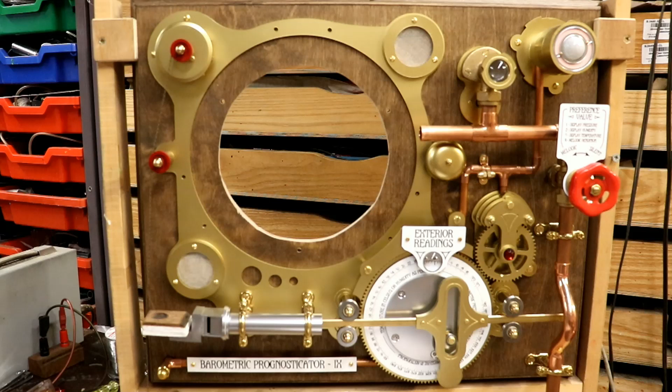Welcome back. Another day. Ooh, bellows, which have now been sanded, cleaned up and stained. They look lovely. And as I said before, I'm going to use gravity, that steel weight in the top. And you can see, even with it just resting on paper, it takes a while to close. And the motor's going to lift them up with a spring and a stop, so they don't risk damaging this really fine, amazing sort of fabric type paper stuff.

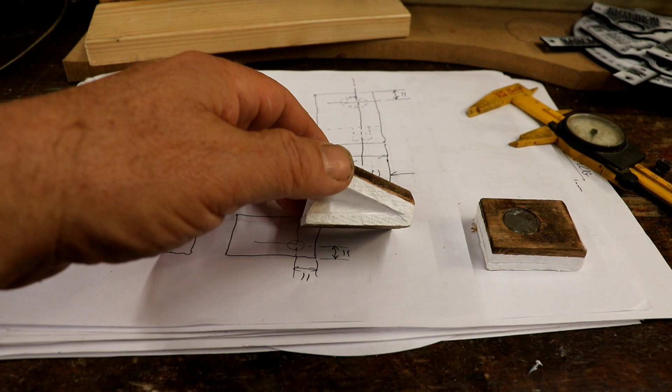In the meanwhile, how exciting! There's a flute. In fact, it's going to end up like that. That's painted up beautifully. And there's the right angle thing. That's just masking tape to make sure that when I glue the bellows on it, it actually does stick properly. I'm so pleased with that mitre joint idea. That worked really, really well. So there's one, and there's another one. Because it's the silver paint, even though I sprayed them last night, I'm going to leave it to set for as long as possible.

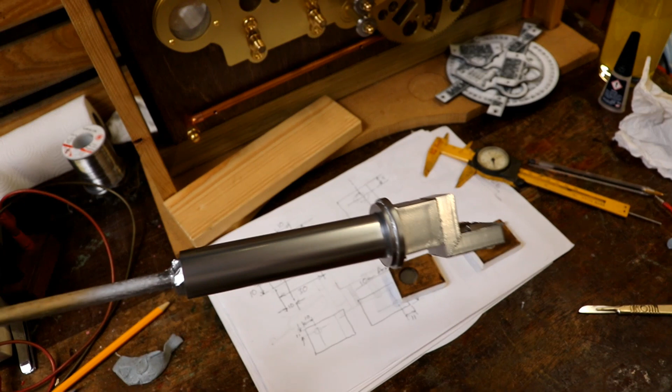Next thing, I think I'm going to turn the bung that fits in here, that changes the pitch. I know I've got more of this pipe, so I can practice with that without touching these. This is my chosen bung plastic. I think it's polyethylene or something like that. It's slightly waxy, so it slips nicely within the acrylic tube. So I'm going to do about 20mm long, and then just turn it down so it slides easily and doesn't stick, but equally is as airtight as possible.

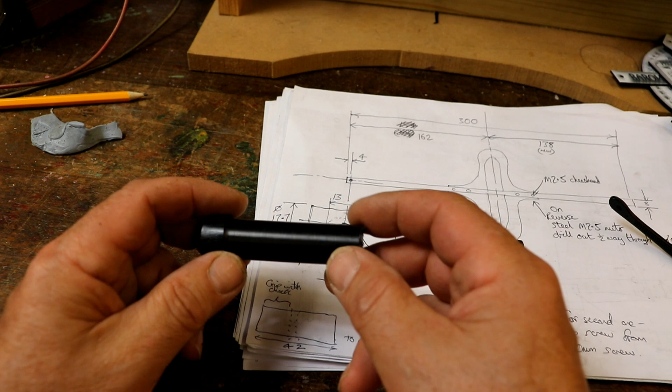There's the drawing, very pleased to have discovered. There's a short bit of tube just to test it. Here's the piece that I've now turned down to 17.7, and look at that. That's beautiful. It doesn't stick. It's big enough and tight enough to block the air, and because I've said it's 17.7, it's going to be 17.7. Well anyway, to cut a long story short, I'm going to put this back in the lathe and then part off the two that need to be 13mm long, if they're a day.

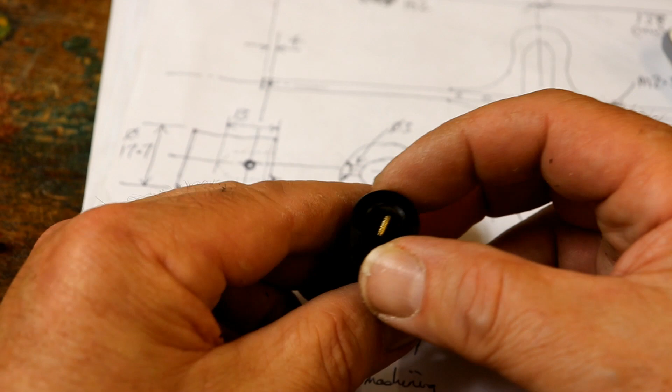And there we have them. Beautiful. It's taken so long, but oh, it's just so lovely. Machining something like this and then beveling the ends and tapping and drilling and this and that. It's very, very satisfying and most enjoyable. And there we are. They're not going to stick, they just move beautifully up inside. Shame they're not seen really, but needs must.

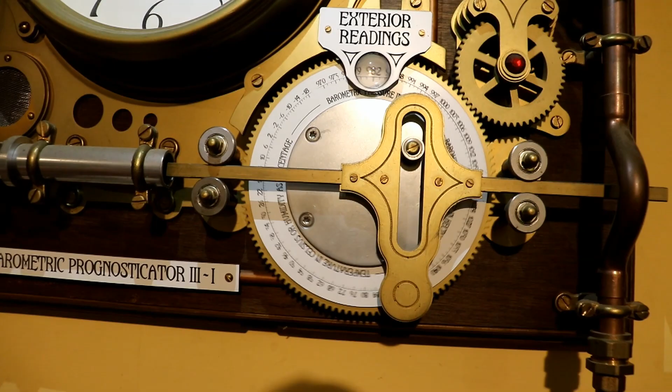Right, now the next thing to do is the Scotch yoke. So walking the dog the other day wondering, is a Scotch yoke or the thing in the middle a crank or a cam? And I think this is a cam follower, just a funny shaped cam follower, which I just remembered is still on the computer, the drawing. So I'll get them cut out. I think 3 pieces of 2mm, so you get one either side and one in the middle, sort of. Ridiculous. 10 minutes later I finally found it. I found it last week and put it in a safe place.

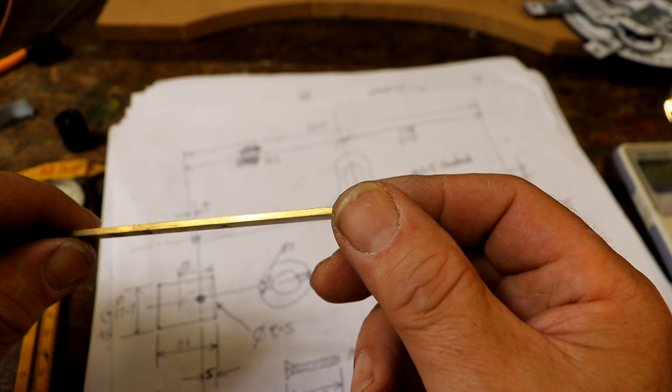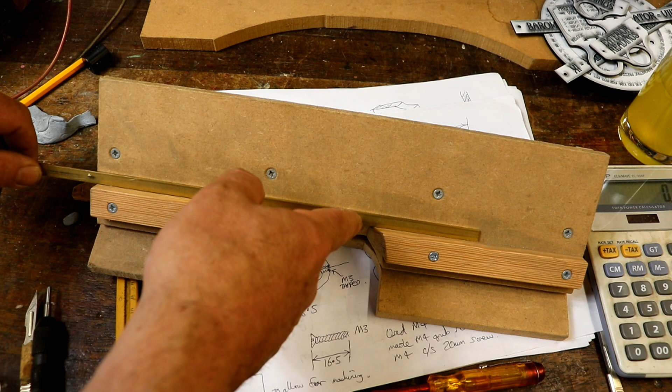Brilliant. Now, there's the strip, and it's not beveled, and I can't find anywhere that sells beveled strip, because obviously the bearings are V-bearings, so it needs something to keep that aligned like so. So I feel another jig coming on, a beveling jig. There we are. So that goes on the pillar drill, the wonderful pillar drill again, so many uses around the home. And then that runs along there, and I think I used an abrasive wheel or possibly a milling cutter just to take it off. I'll see what I've got, get it sorted out, clamped down.

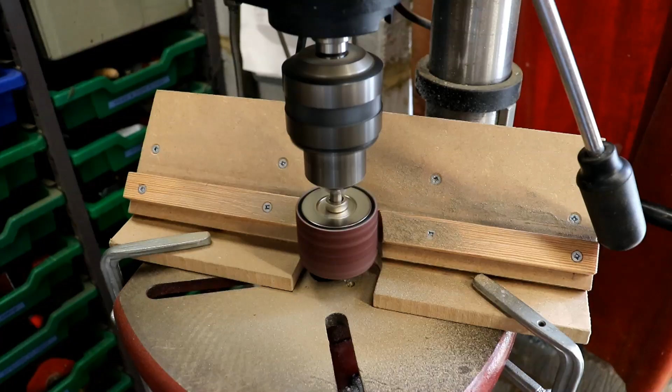I thought I'd try a 4 flute milling cutter, but just feeding it through with finger power, it just shakes and judders all over the place. I'm not going to use that. I think that's why this hole is so big, because it's going to be using an abrasive wheel. Right, that'll do nicely, as you can see, catching the light. It's now turned it into a V thing.

Abrasive wheels, perfect. Now, my stomach is telling me it's lunchtime, so after lunch, even if it isn't, I'm going to have lunch. Who cares? I'm going to cut out and make those bits, cut this to length, and then the idea of the hole in the end of that is that it gives it a little bit of movement, which is important, whilst pulling and pushing it.

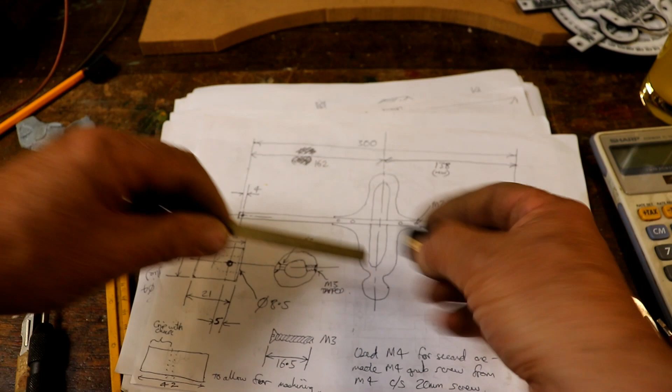Lovely. Right, I've got the cut to length, got a 3mm hole drilled in one end. It's all coming flooding back now. Here's the 3 separate parts, and that sits on there.

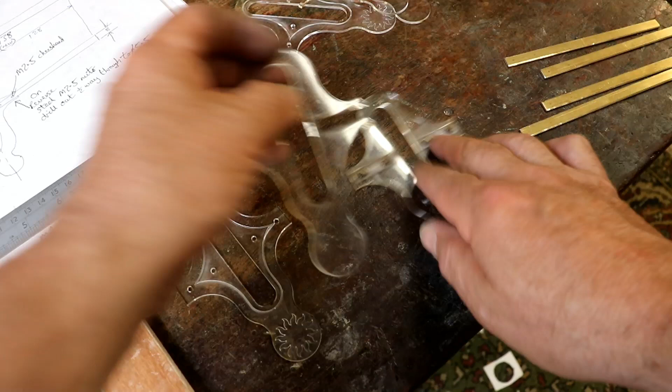That's slightly rebated, with 0.1mm apart lines. There's one 0.1mm line, and it just makes a nice little etched sort of effect. If you put about 10 together, you get a slightly wider effect, slightly deeper as well. And with loads of them together, you can even get a really quite accurate rebate.

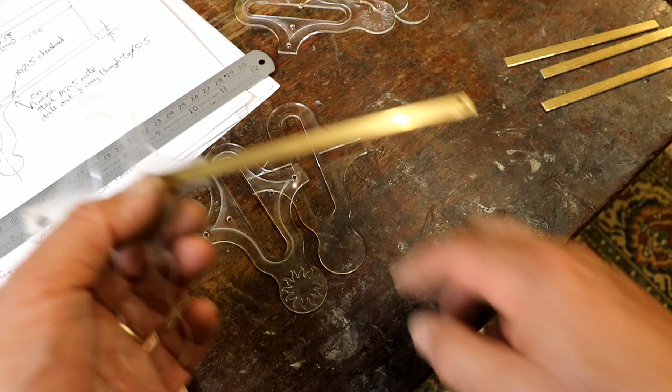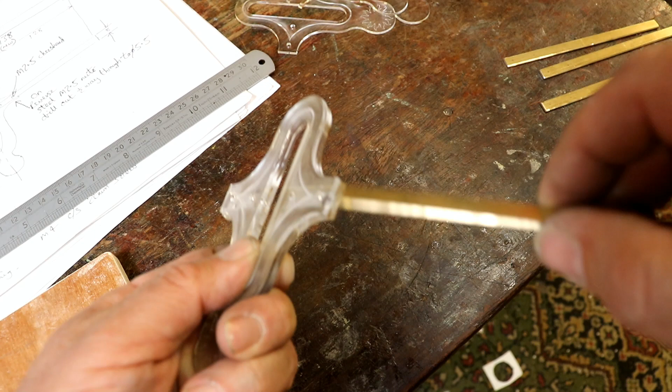Because this brass is just wider than 2mm, and this is 2mm acrylic, if I put that on there, this sits flush with the top. One step further, if I stick that on there, I end up, if it's done neatly, with an L. I can then push that in and screw in.

Oh, amazing. And I'd even thought of putting these nut cutouts on the back so that it grips them and it doesn't protrude out the back any at all.

So I'm very pleased with that, and I was thinking about jigs. I found these two, with vague memories - couldn't figure out what on earth this one was for, and then it came to me: because I'm going to stick these 3 bits together with super glue, I want to make sure they're absolutely smooth.

So you turn it over, that stops it from shooting down into the sanding machine, and you can just touch it up and sand it, or with some wet and dry or something.

So that's good. And then the final jig is this one, and that lines it all up. So I can put each part on there, put glue on, and it'll make sure they're all accurately aligned.

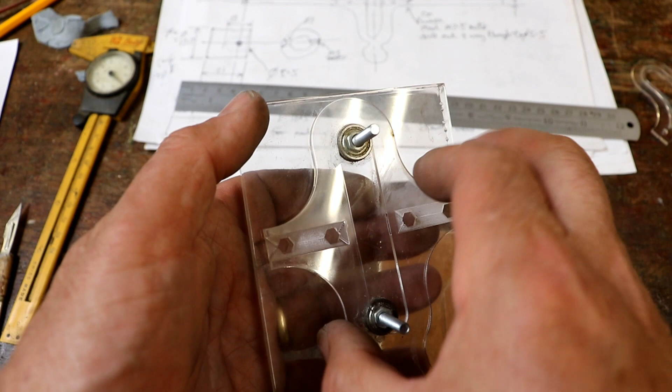How very exciting. Although I have to say, marking out one of the screw holes with my centre punch that I thought would fit through the hole didn't. So I pushed, pinged, and it's cracked it. So just cutting out another one.

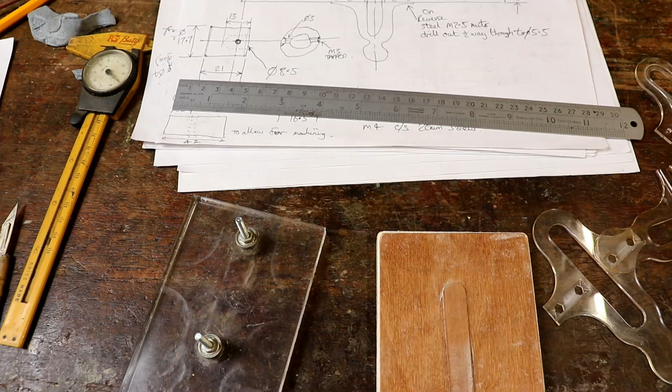Never mind. I'm not going to use the sanding machine actually, that's just too violent. I'm going to use a bit of abrasive paper on a piece of plate glass, which I know is absolutely flat. I've got it the right way around.

Then I can put that like that and do that. And that'll just roughen up the surface to make sure that the super glue actually adheres well, and that there's no little raised sections around the cuts or anything. And there we have it. That's absolutely fine. Yeah, good.

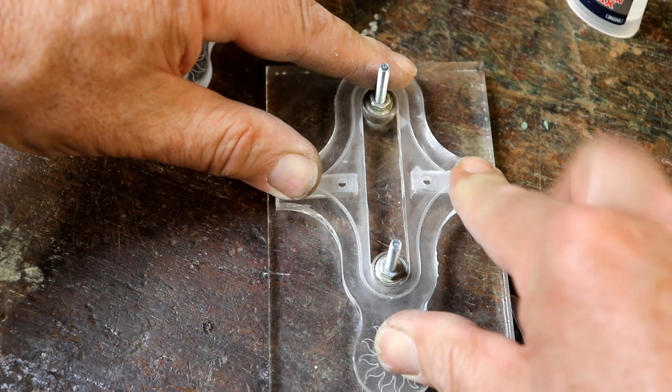Well, I'll get on to the other bits. So you put a bit of glue on, and then, making sure you get it the right way around, you put the next layer on. The bearings ensure it's all going to line up perfectly, and the rough surfaces ensure it's all going to stick really well.

I'll hold that for a little bit, and then I can lift it off and wipe off any excess glue that's squeezed out the sides, and my fingerprint that I've just glued onto the front.

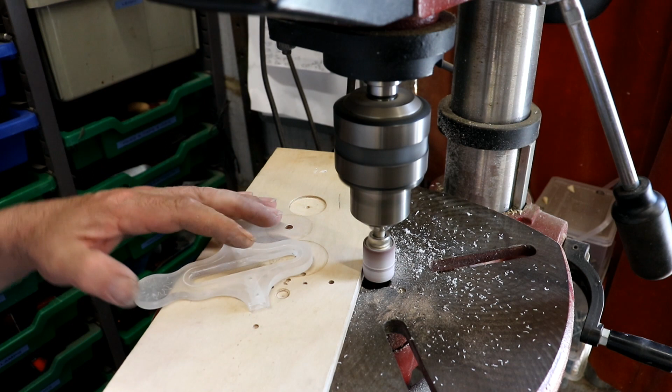Once I've done the outside, I've then got a slight problem. I'm trying to remember how I did it. Obviously this was stuck together on 2 bearings, and they're exactly the same bearings as I need to roll freely up there. Now they're spot on at the moment - they're 13mm bearings, so this probably needs to be 13 1/4 or something like that millimeters.

I haven't got any sanding drums small enough, so I'm going to have a think about that. Oh, by the way, there's my set. They're not very expensive at all, they're ever so useful. They really are.

I've just looked in my abrasives drawer, which funny enough includes taps and dies. Anyway, I've just found this piece of dowel with a piece of abrasive paper stuck in it, and I think I remember lots and lots of flapping going on, so I'll give this a go and see whether that works.

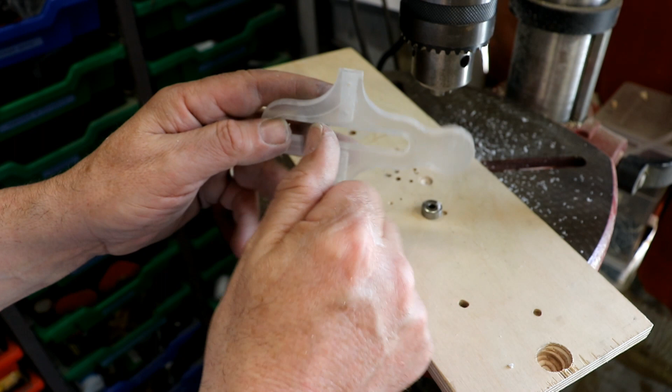As I say, you don't have to take very much off it, it just is tight at the moment. It's exactly 13, so just over 13 should do it.

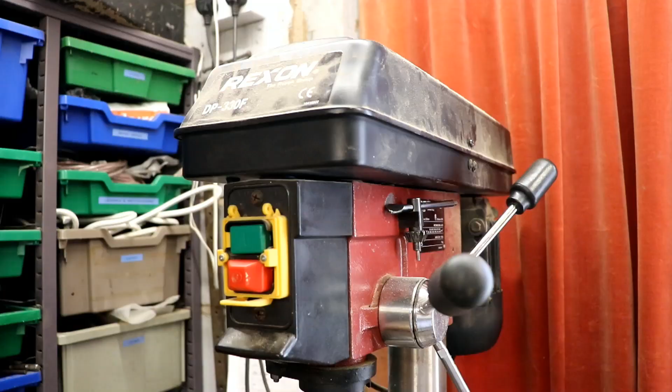I'm always really impressed by this Rexon pillar drill. Really am, been thrilled with it. I wish we'd had them in the school I used to teach at, in the DT department, because for a start it's got a lovely big rack and pinion, so you can't loosen it and drop it on your foot, and kids can't actually lift it because it's so heavy. You just wind it up and down, which is safe as well as really usable.

Also, really clever is the chuck key. And I got my technician at the time to try and find one of these, and you couldn't find them anywhere. They're not available at all.

It's got a spring in it, and that is fantastic, because one of the other things with health and safety in schools with pillar drills is obviously you mustn't leave the chuck key in there, because then you switch it on and it flies out. So we always had them tied on with a bit of string so the string would break and slow it down so it wouldn't injure anyone.

But it's such a simple and effective way. So if I try and leave that in, it springs out. Isn't that fantastic? Very clever idea. And it looks like this is working perfectly. I've just gone around it a couple of times, and now the bearing does fit. I'm just going to do it a few more times to make sure it doesn't stick.

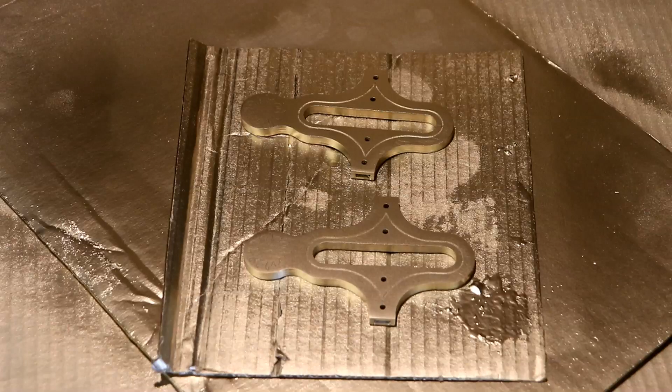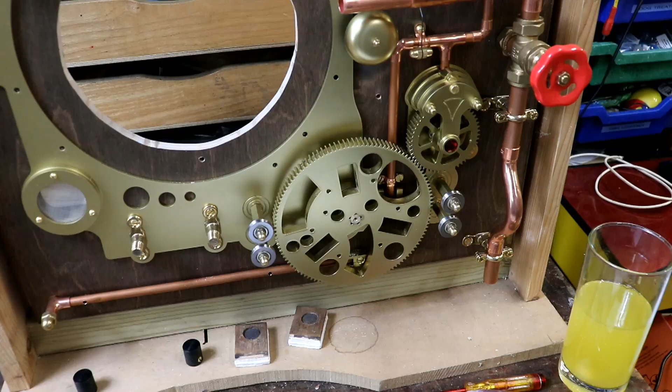Right, getting them sprayed up. It's strange, it looks very shiny and golden brass to me with my eyes, but it looks sort of brown. Oh, how odd. Anyway, while that's drying, I'm going to start fixing signs on.

So that's the first one I'm going to fix on there. And I've got that, which is going to go along there, hopefully, if the holes line up. I've got this one, which explains what the functions are. It's going to go on there. And last but not least, I need to glue a lens in this, because that finally ends up hovering somewhere, magnifying the actual number that you're looking at.

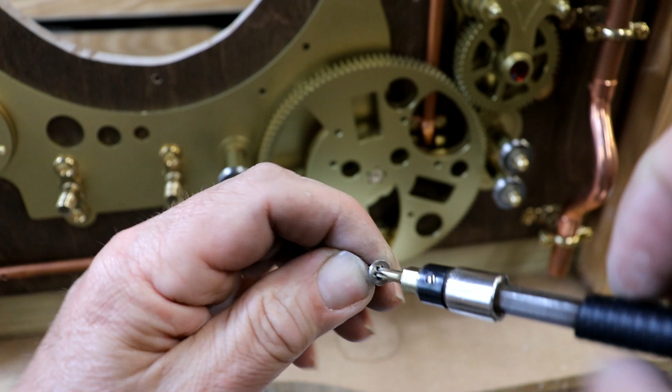And to fix this on, I'm going to be using these little star things. I got them for something, and they actually break it up really nicely. All the other screws are cross-cut brass, and this looks nice. It goes really nicely against, and this has finally made a comeback. There we are - that bit that's been sitting drying for days.

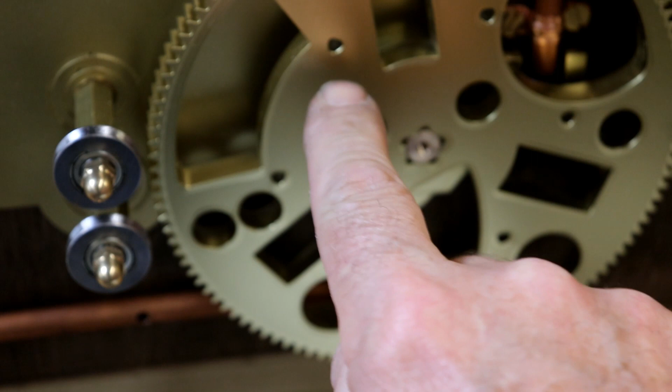So, the other thing worth pointing out, I realised a long time ago, these are the holes that I'm going to be screwing into, and you can see that they're slightly triangular. If you make a triangular hole so that the screw just bears on the straights a little bit, it's almost as though you've tapped it. You don't need to tap it at all. That will just go straight in there and screw in really nice and tightly.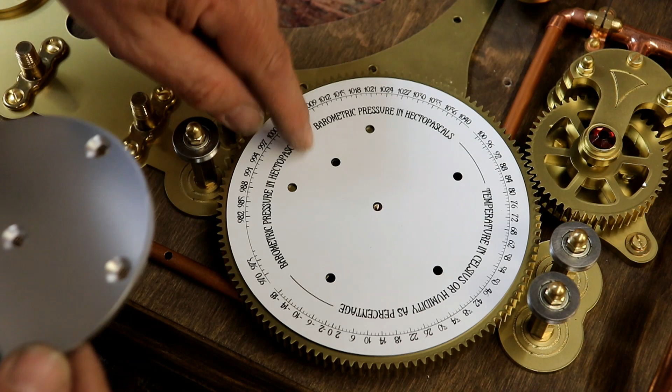The best laid plans. Thought I'd get gravity to help. I line this up with this hole - it's got to line up with that one, and that lines up. None of the others do. And I rested this on - that and that line up, and all the others do. So somehow this is all correct, and these are in completely the wrong place.

Arrgh! I don't think I can get them to fit at all, because there's no plastic under any of them. Oh, sod it. What a shame. So it's not the engraving, it's the actual gear itself. Yeah, there's no plastic under any of these ones.

Need to go away and have a think. What a pain. What I've decided to do in the end is glue a block of acrylic here to fill this gap, because the screw hole lines up. Is it 5? No. Just, oh yes, 1, 2, 3, 4, 5, 6. 1, 2, 3. For those of you eagle-eyed or remotely intelligent viewers, you'll have realised that actually there's 5 holes in that and there's 6 in this. How that has happened, I really don't know.

But anyway, I've glued a block in here, and of course, even though it was lying flat on the table, it was sticking forwards. Then I managed to use the top of the sanding machine just to sand that flat. I can now tap a hole in that.

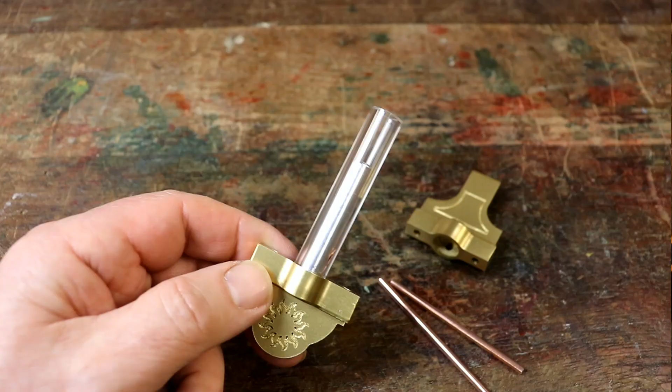These two missed so slightly that I'm drilling them out to 7mm, and I've got some 7mm acrylic rod that some of you may recognise from the chronograph wall clock kit. It's the pendulum, it forms the mercury, pretend mercury.

I'm going to glue them in these holes that I've drilled out to 7, and then I can drill and tap new holes. That means it'll be supported - that one, that one, that one, that one, and that one, and these two, which line up over these 2 holes. It doesn't matter, I'll put screws in and nuts on the back, but that'll be quite enough support.

Right, 6 and 5, how very strange. No idea.

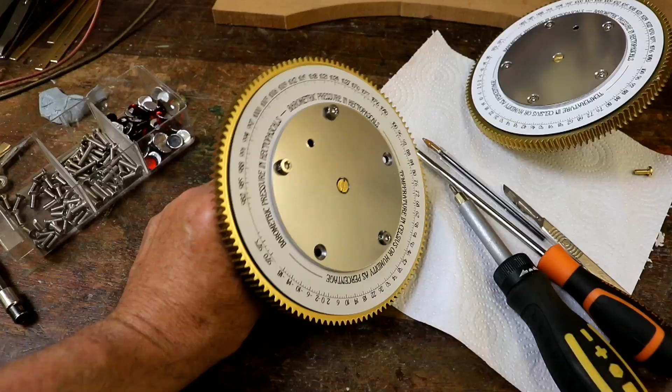Makes your nerves bad doing this. One slip - it's not one of those James Bond huge devices they had to take to pieces really carefully without slipping. I know, because I've done it so many times, and how we laughed. One slip of a screwdriver, scratch that, have to start all over again. Oh, I think that might be one of the reasons I'm using these star screws actually, because theoretically, and I'm not actually going to say that because that's just tempting fate, but they're going together nicely.

That's the main thing. Right, I'm tired. I think I'm going to stop for the day because I'm really looking forward to tomorrow. There are the two signs that I've got fitted onto each one, and there are those bits that are sprayed up and painted, and the brass rods all cut to size and angled and holes ready to put together, and then they will fit on there once the bearings have been adjusted, so that's exciting.

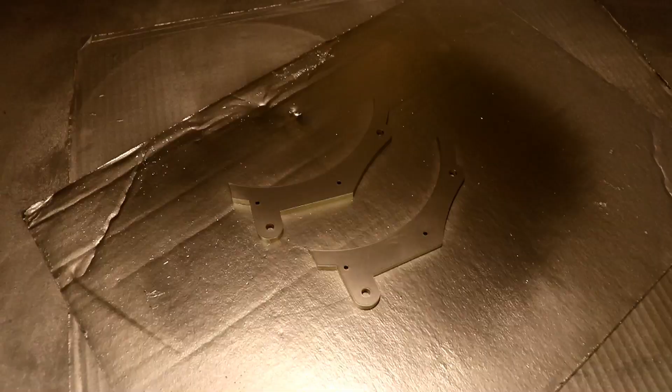Here are the viewing windows with the lenses I've just dripped glue on at the back. Remember I said about not touching them - if you touch them, that's what creates the white misty stuff, so I've been really careful not to touch them, and got air flowing around them to help. There's also these two bits now sprayed up, which support the viewing lens and go around the number dial, making it look really interesting. I can put that together tomorrow.

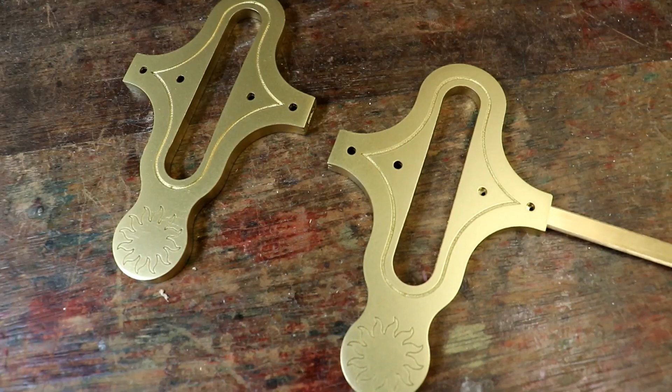Thankfully, because I've worked everything out and there's nothing else left to figure out, I should get a good night's sleep with a bit of luck. Oh yeah, and the cuckoos have been drying all day, so they'll definitely be ready for fixing together - the bellows onto the cuckoo sounders, and the plungers onto the ends of the brass rods.

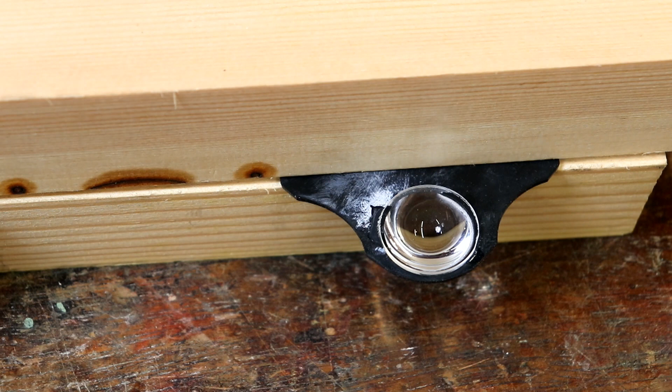It's the next morning, these are now dry. You can see why superglue is used in crime scene investigations - I wasn't even aware I'd touched the back of this. I was very careful not to touch the lens, but even this engraving, I must have picked it up once off the laser cutter. You can see it's picked up traces of fingerprint. It's amazing, but it doesn't matter because it's on the back. Amazing stuff - exciting day.

Get them on, get them together - and suddenly, while walking the dog, I realised I might even be able to get the whole thing done. I'm not sure, but there's nothing to stop me putting the clock face on. It's getting painted up - in fact, it is painted up, all ready to go. I haven't put it on yet because I was concerned about getting it damaged. And the cuckoo... oh, right, onwards and upwards.

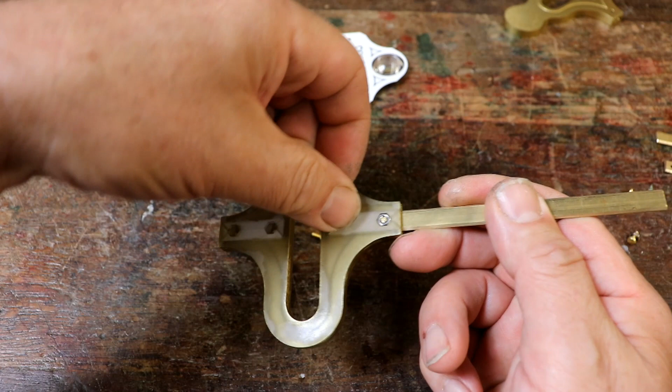Look, I'm so pleased with this design - it's so enjoyable when you get something that really works well. There we are, cut out for the nut there. Flip it over - I'm not actually going to manage to get all the... oh no, oops, the camera's on, oh well. Slide that in, and there you have it.

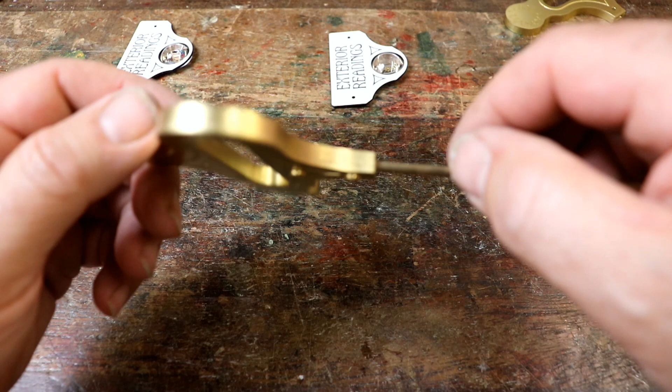I'm so pleased with that, it works beautifully. I haven't bothered painting the back because it won't be seen, but you can see how it all works and fits together. As I said, the original one was sitting on the front or back and was lopsided, always pulling it over, which didn't work at all. Having it like this means it naturally hangs vertically, with the extra little weight at the bottom, which is great.

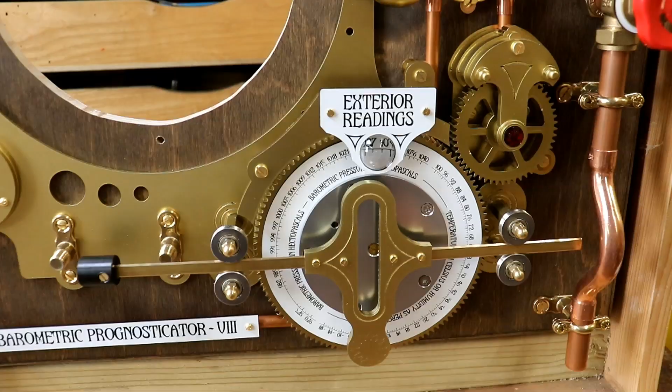And there we have it. So there's the Scotch yoke and there's the plunger, and you can see it's got a little bit of movement, just to reduce the need to have the whole thing absolutely parallel. So if there are slight angles or changes, this can wobble around a bit, which is important. Oh, misses - I've got that on, and that looks lovely with this little curvy bit and things. I've also just provisionally laid that in and adjusted these to make sure there's enough. And remember, they're offset, so it's really nice and easy to adjust them.

The reason I wanted to put that in is I want to work out a spacer. There's the bearing, and that obviously needs to sit at this distance, so I need to measure that. I just wanted to check the actual distance before I screwed anything together, so I'll get on and do that.

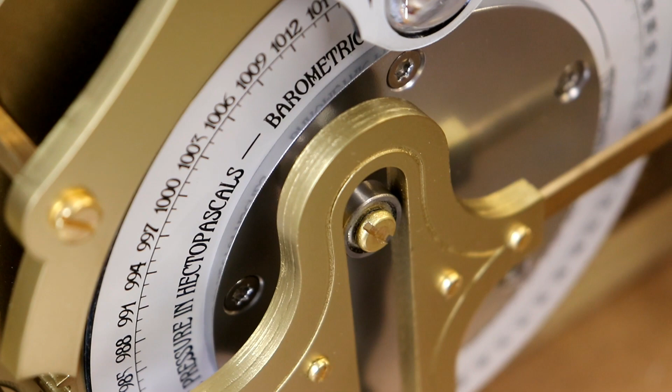I'm very pleased with this - it needed to be. I did some calculations to make sure my brain wasn't being a muppet, and worked out that the spacer needed to be 7, then realised an M4 dome nut, turned down the end, taking about 1 millimetre off, drilled out to 4 millimetre, works perfectly. I don't know whether you can see - that's it, it's reflected so it looks like two nuts, but that's a dome nut that spaces the bearing halfway between the front and back of the Scotch yoke.

Just when you thought you had everything lined up. Got that fixed down, and I've learnt from previous experience - never over-tighten the Munsen rings on this, even though the acrylic tube is 22mm diameter and the Munsen rings are the same. They're always designed slightly tighter to clamp copper pipes, so if you tighten them really tightly, over months and months it can slowly deform the acrylic tube until the plunger doesn't work. And I've just tried the plunger in this and it doesn't fit anyway - it gets stuck at this end and at that end.

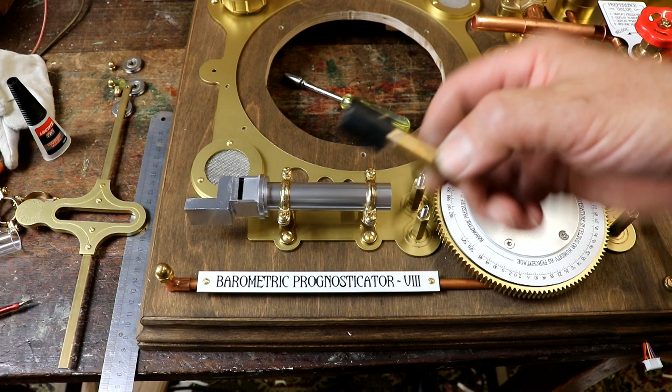So what I'm going to do is I've made a little jig, as always, so I can grip it in the vise. Just turn that down to 8.5mm, drill the hole through, so I can now clamp that in the vise and take ever such a minuscule amount off this. That's better. I've taken an absolute minuscule amount off, but now it evenly slides up and down, which is great.

Secret that I have up my sleeve: graphite powder, which you can buy to lubricate locks. Apparently that's what it's used for, but because I don't want to put any synthetic lubrication in here in case it has a long-term effect on the plastic, I'm going to use graphite because that's inert, sort of. That does make it very, very slippery.

I've just got to share this with you, it's so exciting. It used to be such a problem because I remember I didn't want to move the motor too far, and it took so long to set this up, tightening all the screws, fiddling all the layers and everything. But now these two hold it together, and that moves it. I've just realised to set this up with the bearings, I've just slid it out of the way. So there's the motor, and I can spin this to my heart's content. And there we have it.

No friction. Having these bearings mounted on these offset hexagonal brass rods is great, because to adjust them you can just tweak them ever so slightly until you get them where you want. Put the spanner on, screwdriver on the back, and just tighten them really tightly. The way I found to do it is to get it so that the bottom two bearings are just moving, so you know that they're supporting it, not all the time but just moving sufficiently.

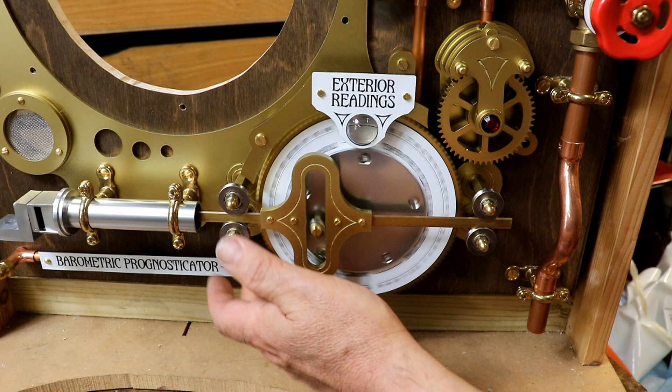Make sure this isn't too high so the bearings get stuck at the bottom, so I've lowered it a little bit. And then once you've got the bottom two bearings done, this will be angled back because it's not balanced. You just tighten the top two ever so gently until they again just turn slightly. You don't want too much pressure, especially with me using that abrasive disc wheel to sand the bevel on that. If I had a milling machine or something I could do it more accurately, but this is absolutely fine.

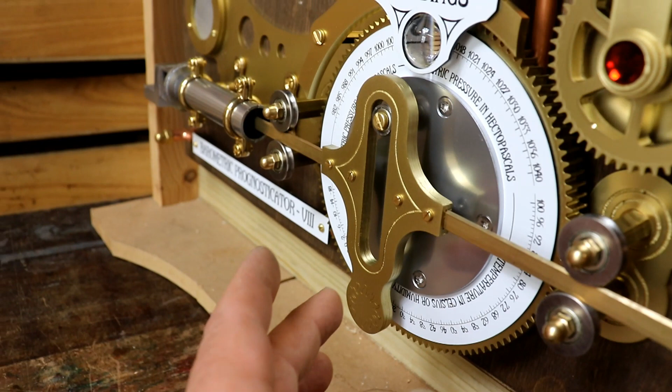You can see, ever the perfectionist, most annoyingly, I've noticed this bearing was a little bit too far back, so I've undone it and put a washer in to bring it forward a bit. I also noticed that this keeps, despite the weight being at the bottom, leaning back like this. And then I remembered on the design I'd got some card washers, and I vaguely remember putting one under each of these. So here we have it, ready to cut out.

I've left a little gap at the top of each one so they don't all fall apart, because I've done that before and you cut them all out and then they all fall through the honeycomb and you lose the whole lot. So doing it this way should work really well. Let's see.

And here we have them. Every home should have one, and this is what I mean by leaving a little tab. You can just do that. What a joy, rather than trying to dig around underneath the honeycomb thing. This card is absolutely gorgeous. It's metallic, and it's so metallic it'll bend and actually stay, which is really useful.

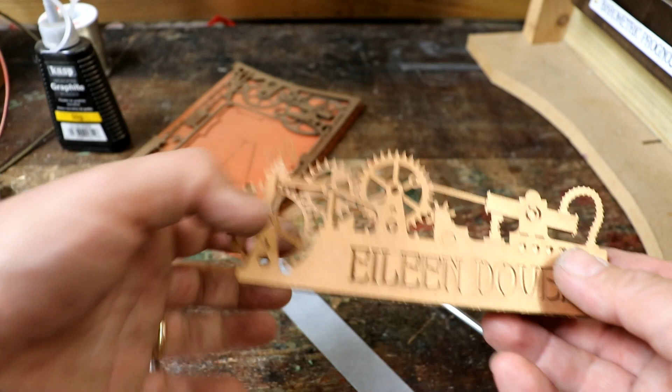I've used it to design the steampunk wedding seating things, which this was a prototype. But now it's got different colour gears and things, and the wedding invite, which is nice. That, by the way, is the window where you put the information that you desire to share with your friends. And there's even a little gap at the back, a pocket at the back, to put maps and information in.

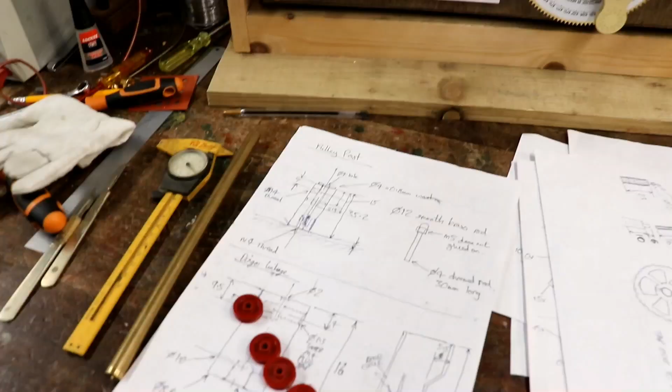Let's test the pitch. Got these pulleys, and I'll need one of them to be a pulley, basically, which is going to go there. And obviously it can't be just any pulley, it needs to be a steampunk pulley. So it's going to be mounted on an extraordinarily complicated brass thing made of 12mm smooth brass rod.

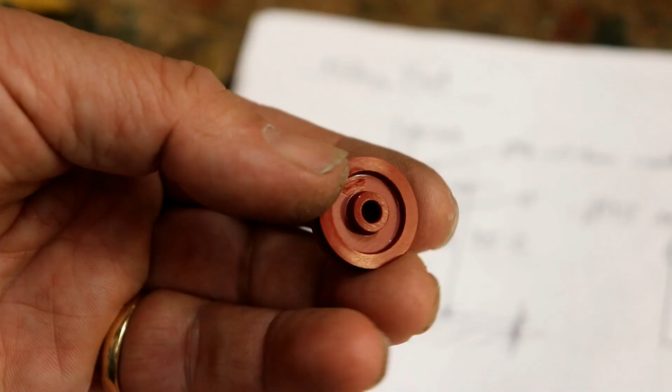I will show you what goes into making something like this. This one has got a smooth brass piece of rod that sticks in the top so it doesn't wear out the middle of this as it turns, which is probably really overkill. I could probably just use a brass screw, but never mind, it needs must and all that. Hopefully you'll be able to see what's going on.

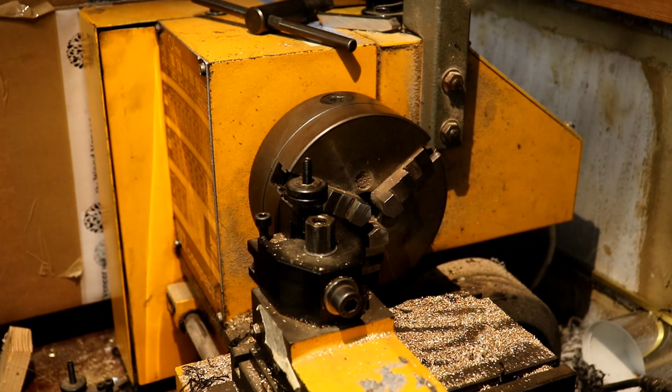So first thing to do, cut two lengths, 35.2mm. 35.2, how ridiculous. So we put a length into the chuck. This end's nice and flat because I parted it off before. Then we use the quick release chuck, which is really good.

Every tool just lifts off like that, and we put the parting off tool, which is carefully stored there. Wind that out of the way. Slot that in, and the good thing about these quick release chucks is there's a height stop here, so for each tool, you can set it up.

Now, I know this isn't quite the right way to do it, but what is it, 35.2? I'm going to use a ruler to get it roughly right, and then get the spanner from the other side of the room. I'm going to lock this whole section off. I wonder if I can go back a little bit.

Then I'm going to put the ruler up to 35.2. That's absolutely spot on actually, but I can now adjust it with this smaller adjuster, which, let's just move all this so you can get a better idea. I'll keep the focus on there. So I can adjust it with this. Now, safety goggles, and I'll part that off.

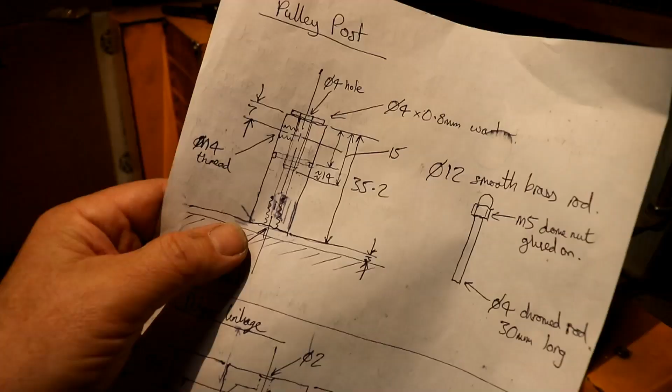Next thing is to drill a 4mm diameter hole, 15mm deep into one end.

So, centre drill first of all, so I can find the centre, and I'm just going to touch that on. Now, just to start the hole, I'm going to put the 4mm drill bit in, and there are markings just here, so I'm going to set that to 0 and then slide the whole thing along and just touch it on the end, which you can't see now, and then wind this in until that says 15.

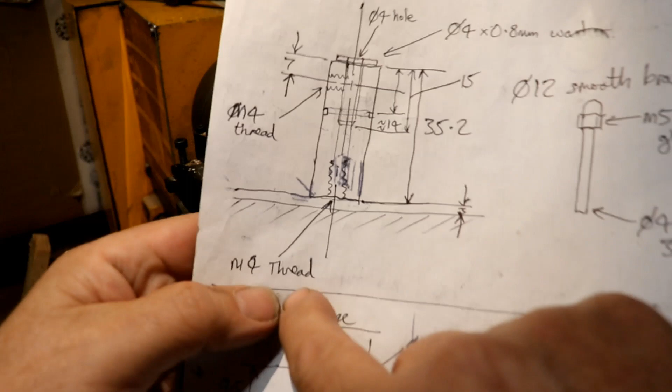Now at the other end it needs to be tapped, M4 thread. It doesn't say how long, but I'll go in probably about 15. And this time, because I'm going to put a thread on it, M4 thread, let me just check if that is M4, yeah, it needs to have a 3.3mm hole.

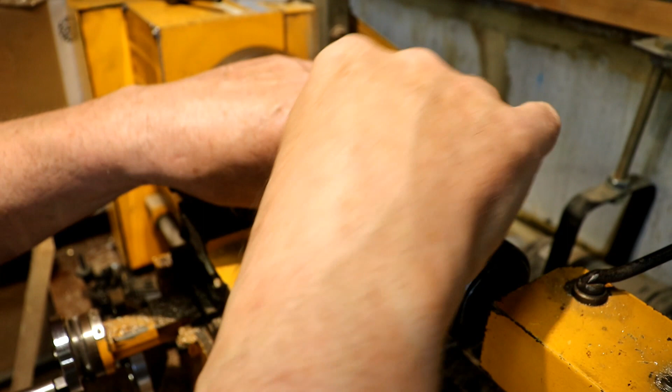And again, to get it, say 15 deep, lock it off there. Then to tap the thread, we need the M4 tap. I'm not going to drive this in because that would be an absolute disaster, so what you can do is a bit naughty: start it going, and then you can just look at that. So now that's a threaded M4 hole, which is exciting.

Right, next bit. I want actually on this to cut a little decorative slot in, that's say 14mm from the end, the other end. So put that way around. Wind that in. Get the ruler. Oops, loosen that.

14. Lock that off again, and this just needs to be about 1 millimetre deep. So to do 1 millimetre.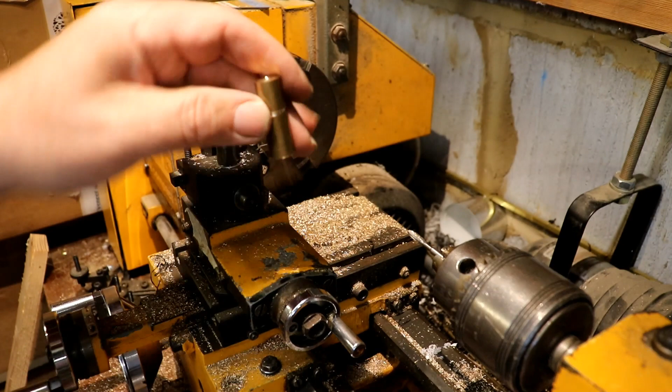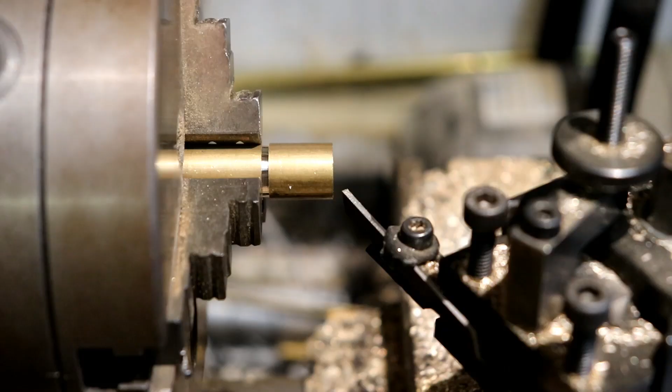Got that bit machined, that looks very pleasant. And one other thing which I forgot to do is just to put a little bevel on the edges to stop them being sharp. Right, not the proper use for a parting off tool, but it'll suffice. Throw that out of the chuck, that's better. Right, so got nice little bevels and things.

Now the next thing, which isn't 4mm, I need to drill and tap a small hole there. I think it's M4, M3 for a, well, I'm not sure, I can tell you. It is M4, 7mm down into the centre.

Right, now I do apologise for proper machinists who will clamp this. I've got a clamp that goes on here, but it gets in the way, so I'm going to do it like that. As I say, I do apologise.

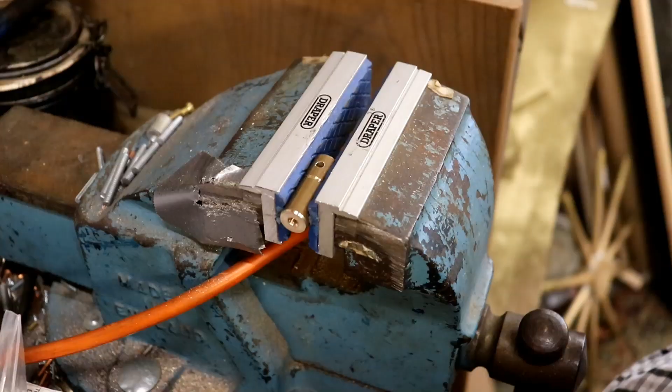Okay, right, now to tap this. I'm going to tap this with a manual tap wrench. I've put it in the lovely magnetic rubber vice jaws, and then check that it all looks like it's lined up. Not using any thread cutting lubricant because brass is self-lubricating. It's lovely. Right, so that's nice.

And then I'm just going to countersink this end bit a little bit because it makes it look really nice. Now, one thing to be aware of with taps, you can get bullnose taps which the thread cuts much nearer to the end, and you can get different stage taps where you have one that's very angled.

I can't see a thing. It's sort of conical, so it gives you a really easy start, a bit like this one, although I think this is an intermediary one where the thread does cut still fairly quickly. So to cut a long story short, you could use one to start the thread, then use a bullnose one if you haven't got the depth to go past to the thread that you actually want. Whereas with this, I had the hole down here, so by the time that reached there, it had finished cutting all the thread that I require. Right, let's just touch this on.

That's very nice, it just gives a lovely little dimple effect. Right, now I need 30mm of chromed steel rod that you get with modelling kits, because that means this spins beautifully. 30mm, now I could cut that on the lathe, but it's just not worth the aggro because it's so near the centre and it's steel and all sorts of other things. So I think we're going to resort to the hacksaw, or junior hacksaw.

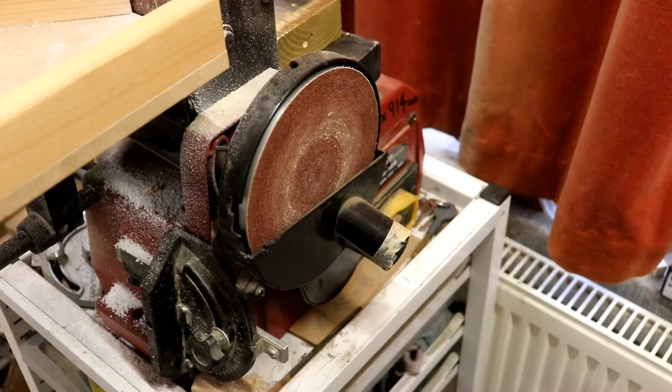Doesn't take long. By the time I'd set the lathe up and everything else, it would have been ages in the future. Now I'm going to use the sanding disc, which I don't usually use other than with metal. It's also very good for if you've cut a bolt or screw down, you can just twist it around on this and it sorts it out. Well, it's just taken the rough ends off.

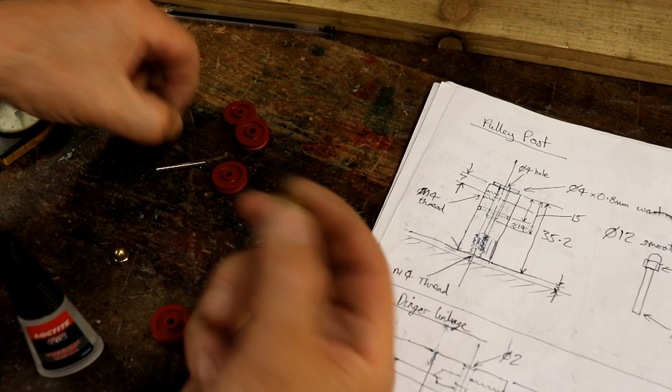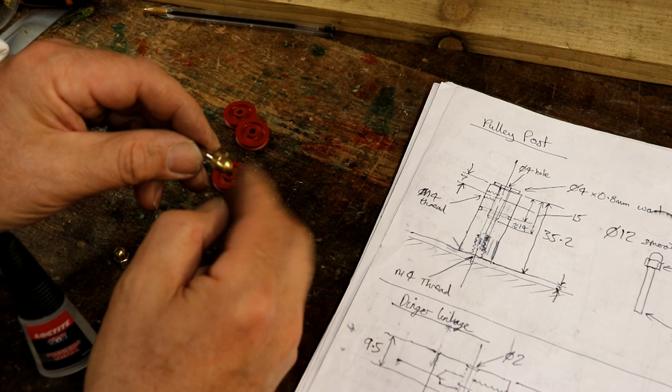Right, I need to glue an M5 dome nut on to the end of the rods. As I happen to find, it looks nice. It also holds it on. I can also get it off if I need to with the grub screw. And I found that an M5 nut just fits onto M4 rod really nicely. I think this is a job for the wonderful Blu Tack, or whatever it's called in different countries. It's the stuff that you can stick posters onto walls with. But it is ever so useful as a sort of third hand.

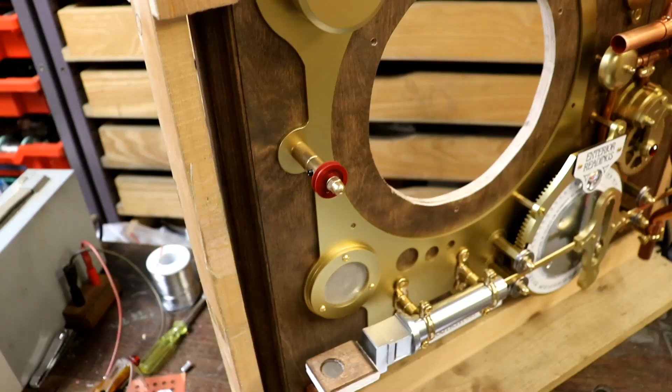And of course I'm going to use super glue. I probably should use epoxy glue or something like that, but I've never had a problem with super glue. It's got all the threads to sort of soak into. You can be quite generous with it, and it sets so hard and fills spaces up. And there you have it, fixed into place. It just looks so nice.

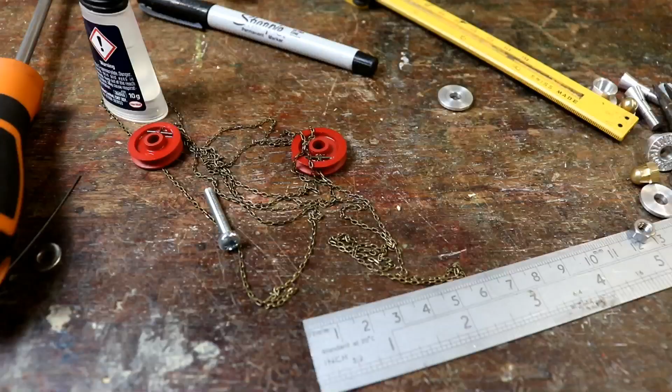Again, proper machined brass with a grub screw facing outwards, and that's screwed on very securely. Oops. With an M5 steel bolt screw and a nice large washer. While I've been doing that, I've also drilled out these to 5mm and fixed on this lovely proper, I don't know what the expression is, it's not just bent chain, it's actually brazed or endless. It must be brazed or something, because it is ever so strong for the size of it.

It's amazing. So I've used this on these machines just to work the bellows and other machines to do other bits and pieces, and I'd fix it onto this drive pulley, little 2mm hole, poke it through, push a little bit of spring steel through, and then glue that in place. While that's all gluing and drying and setting, we might take the dog for a walk.

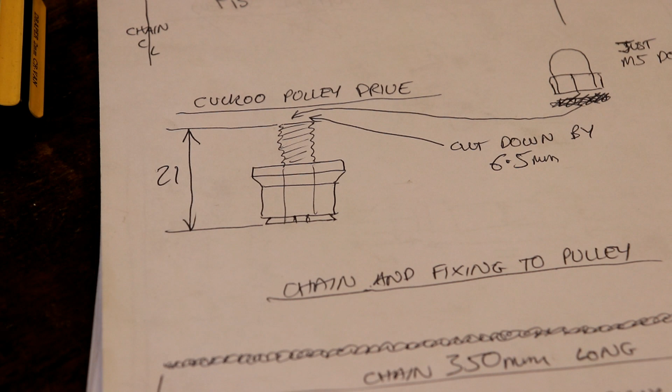The fun never stops. While the glue's drying, I'm going to make the pulley puller thing that fixes the chain onto the Cuckoo bellows motor. And I discovered these things. I spent ages trying to find some way of doing it. Rather than making something, I found these. They are model propeller adapters or something. They're a way of fixing propellers onto motors with 2mm spindles.

As you can see, they've got a sort of chuck mechanism there. Absolutely perfect, made of aluminium, nice and light. Add a little bit of silver to the mix. So just need to do a little bit of fiddling, cutting them down and stuff, get that done.

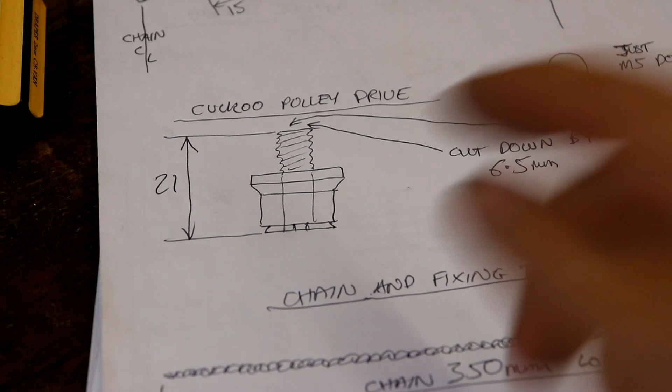Oh, and by the way, I forgot to mention, as you hadn't realised, of course, red pulleys, they have to be red because, as I've said lots of times, zoink, we've got the red handle, we've got the red jewel there. I think there's another couple of red bits around, so now there'll be a couple of red bits over this side. You get a spanner on the back bit which has got a little flat on it, so you've got something to tighten against, and you just tighten it. You tighten it a couple of times first, and then that locks it in place.

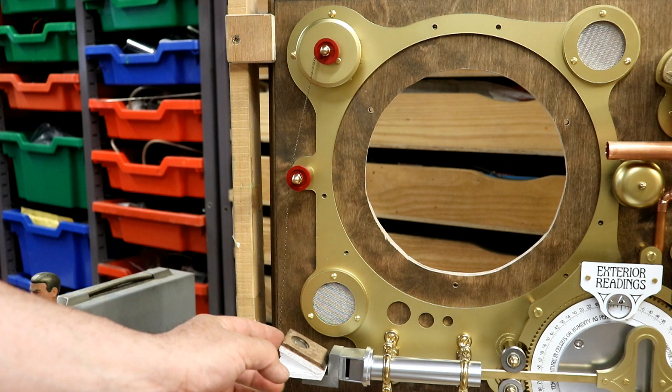And now you can see where it's going. So it's going down there over the pulley, and then it's going to connect via a spring and things to this so it can open it, not jam the motor shut, not break that really lovely bellows, but just pull and then release it under gravity. So I think that's a job for another day, because to be honest with you, I've talked far too much today, so I'm going to go and do some video editing.